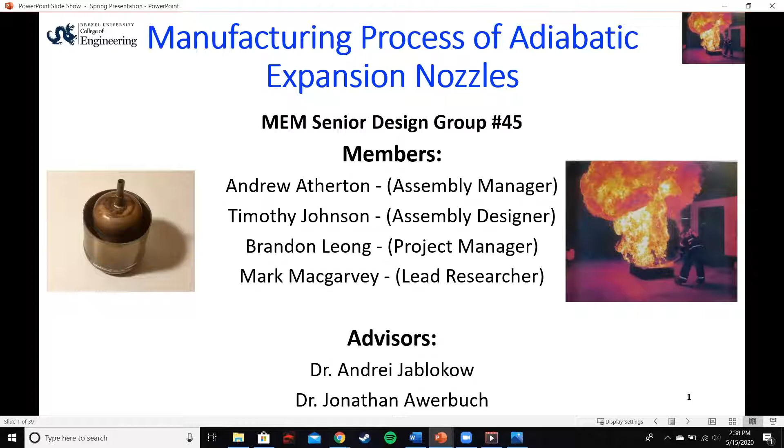The needs for our project were to create a similar extinguishing nozzle that was similar or reduced in cost. We needed to also reduce the production time from the current 5+ hours to about an hour per unit. We also wanted to maintain or exceed the current reliability and be able to put out fires with at least the same efficiency as the original methods or even faster.

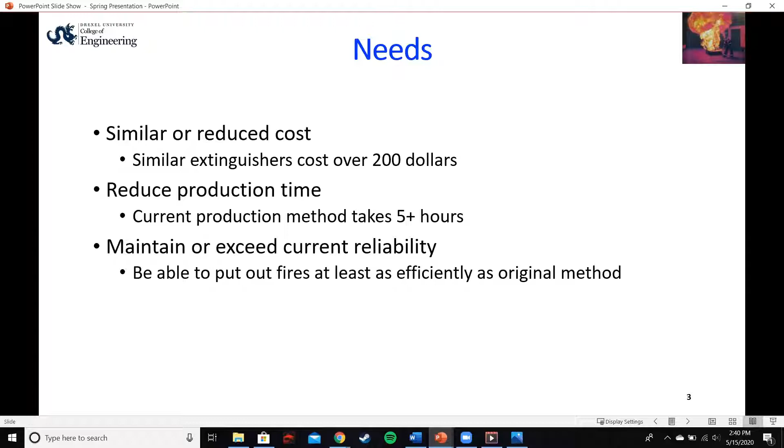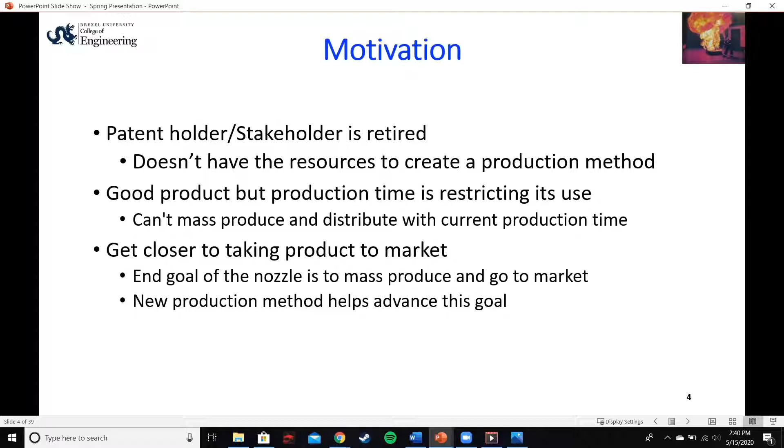So our primary stakeholder is retired chemist Robert Philipczak, the creator and patent holder. Other people who could use this product are police officers, firefighters, first responders, and small business owners.

Current production of the nozzle takes 5 to 8 hours per unit. It's unorganized and it has high production costs and many errors. Product cannot be mass produced under these conditions.

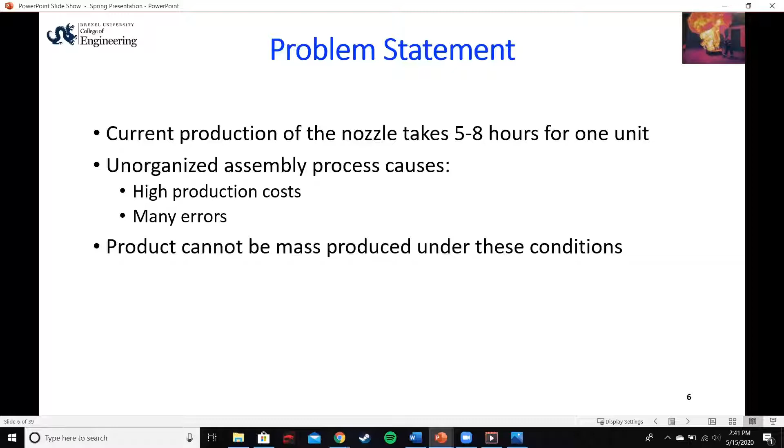So our solution is to develop an efficient and reliable assembly method, reduce current production time by a factor of 10, and minimize production costs and labor by a factor of 10.

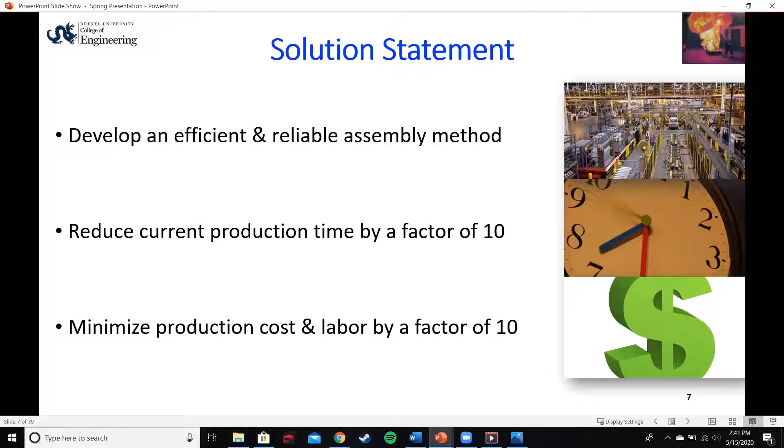Our approach had multiple methods. The first was to 3D print, the second a jig, and the third was to press fit all the parts together. We consulted various professors and machinists about proposed designs.

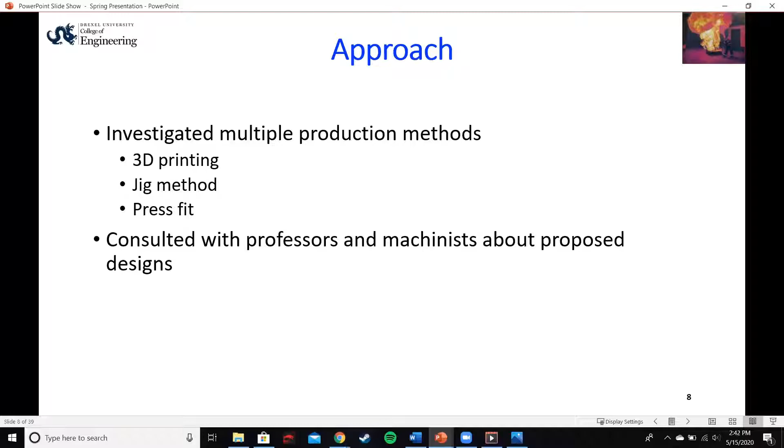Now I'll be passing the design description on to Andrew.

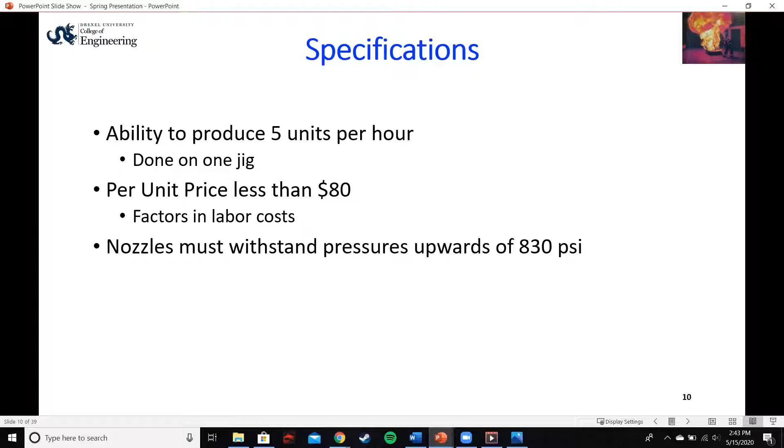For our specifications, we are trying to make 5 units at once done on a jig in 1 hour and cut the unit price down to $80, factoring in costs of labor. Also, the nozzle must withstand pressures upward of 830 psi.

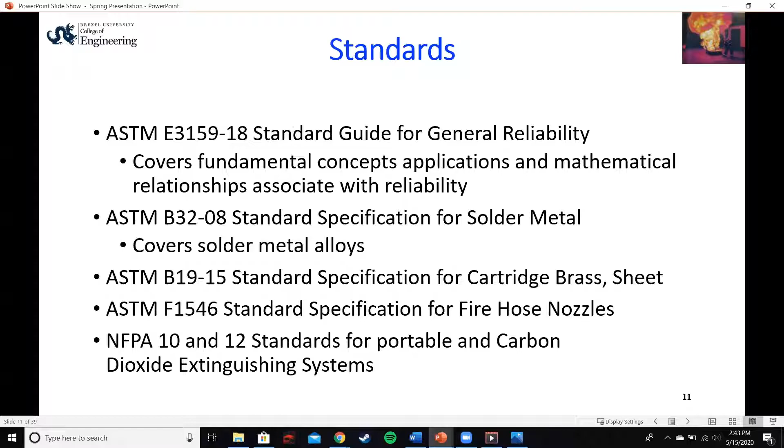Following are some standards that are used for the nozzle and manufacturing quality.

Due to the virus and the pandemic going on, we're no longer able to do any physical work on our project, which was stopped right after the prototyping. Therefore, we weren't able to do any of the physical tests that we had planned, including drop tests, flow tests, and putting the nozzles on real fire extinguishers to see how they worked.

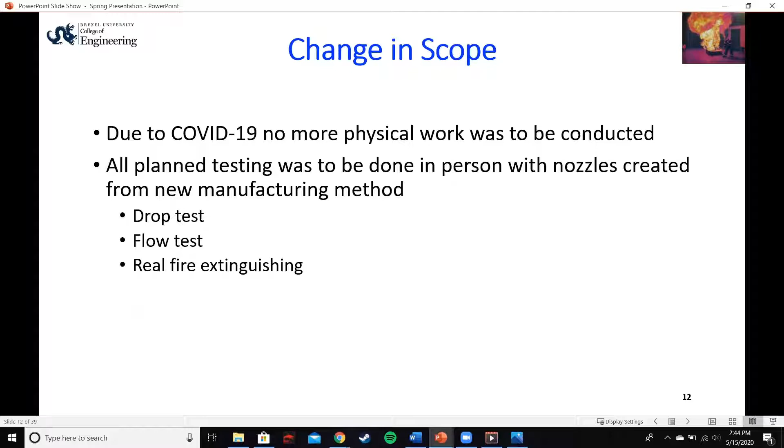Going over the concepts that we came up with, the 3 that we talked about were 3D printing the nozzle, making a jig to be able to put all the parts together more efficiently, and doing a press fit to avoid having to solder.

For 3D printing, one of the pros is that with many printers, we can be doing many of the nozzles simultaneously. One big problem is they take a long time to make one, taking upwards of 5 hours to make just a solid cube without any of the complexity that the nozzle would require.

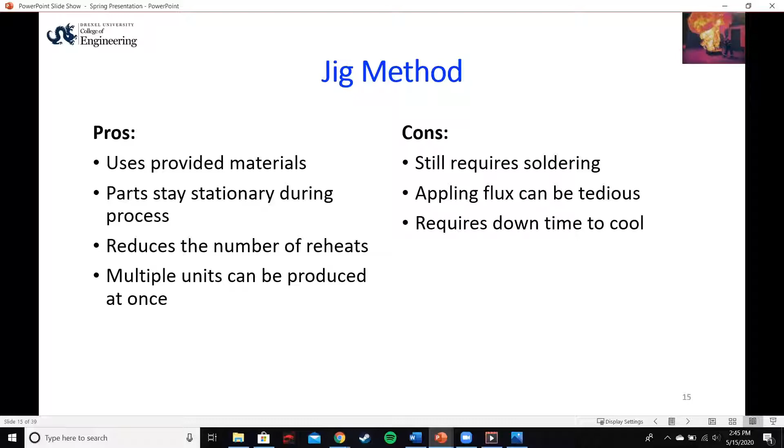For the jig method, one big pro is that we can have one jig that has a number of different stations, meaning that we'll be able to make multiple units at one time. But the big con to that is it still requires soldering, which can be tedious.

These 2 pictures are models of the jigs that we designed, first being just the plate without any pegs in it, second being pegs that will hold the parts of the nozzle before soldering.

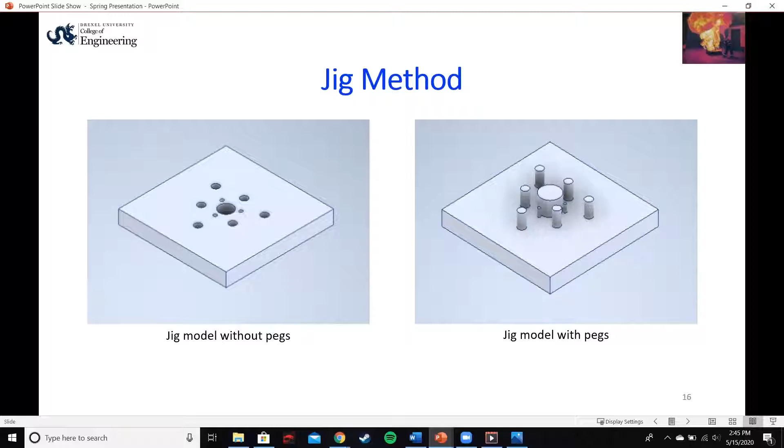For the press fit method, the big pro is that it avoids using soldering, which, like I said earlier, is very tedious. But the big con is the wall thickness for threading the end caps on is too small in the current materials that we have, therefore it will have to increase the overall size.

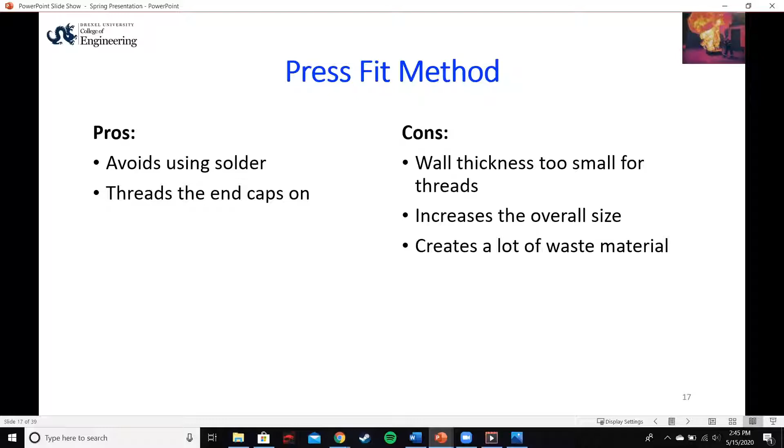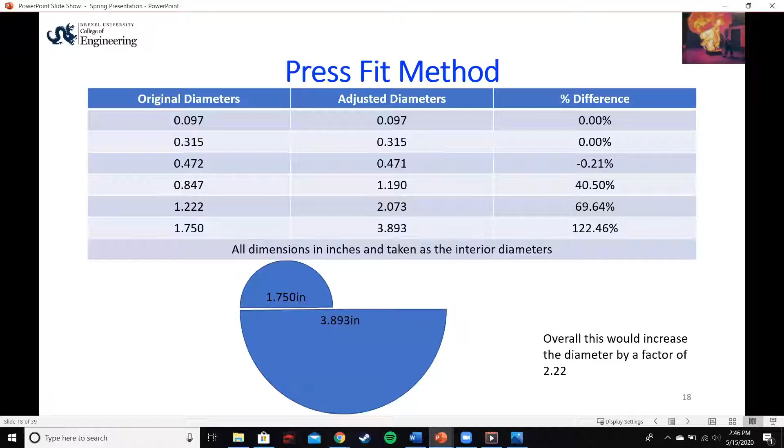So the method that we selected is going to be using the jig. So what we did is we took aluminum material to make the jig out of. Aluminum was selected because solder will not stick to the aluminum if it were to, say, drip onto one of the pegs as we were putting the nozzle together.

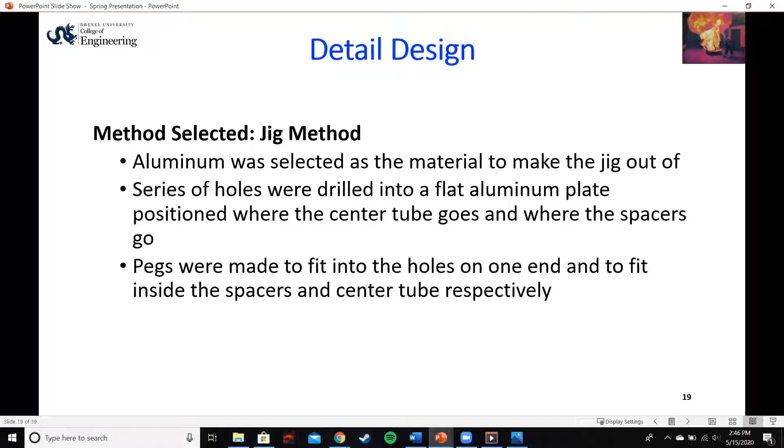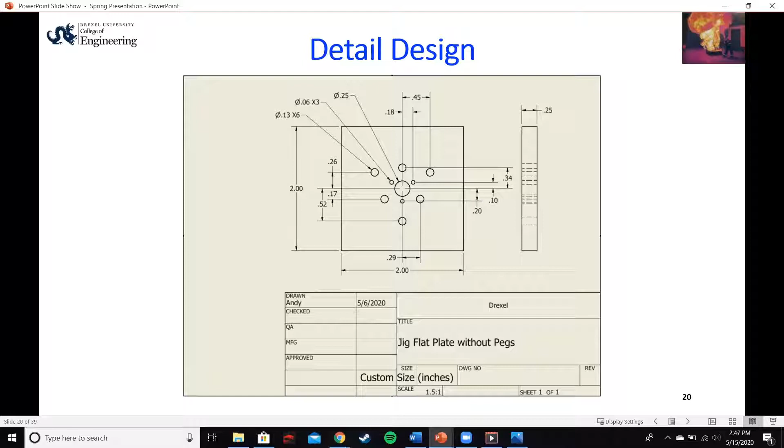Then a series of holes were drilled into the flat aluminum plate and pegs were put into them to fit the spacers on and the tubes simultaneously. Following is a CAD drawing of our plate with the dimensions for where all of the holes went.

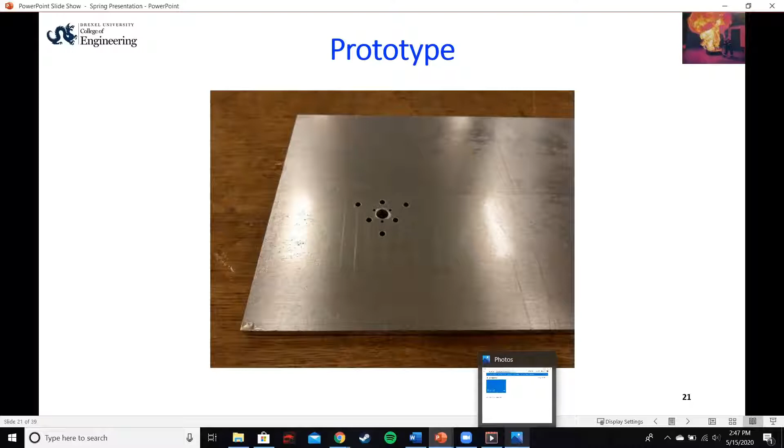Now, as a prototype, we didn't fully finish making our prototype. This is just the aluminum plate that has the holes drilled into it. But if you direct your attention here, we have an animation of where the nozzle would be going.

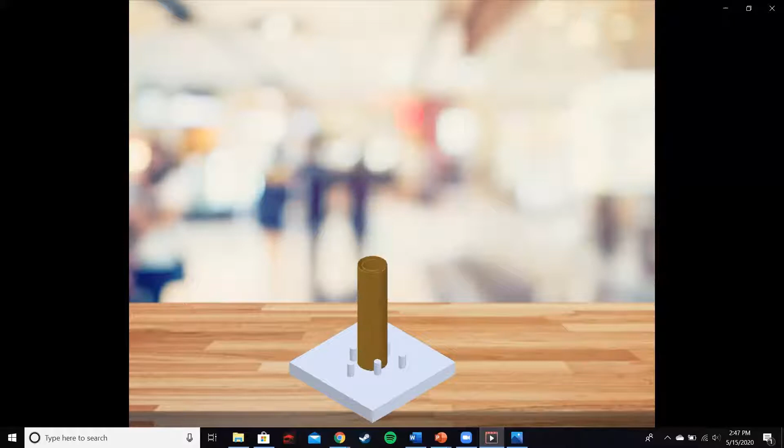So first we have the center tube come down into the center, and then we put on a set of 3 small spacers, which then holds the next tube a certain distance away and centers everything. Then the next row of spacers, as well as the next tube, and then this process gets copied one last time.

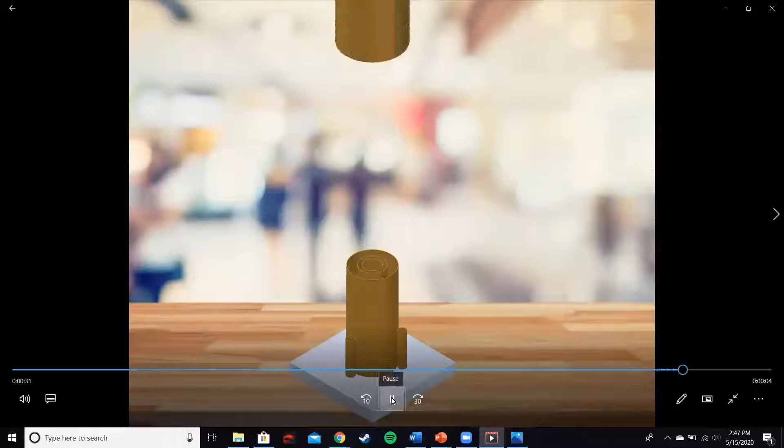So now I'm going to pass this off to Timothy to go over the discussion.

The first thing we have to look at in the discussion is, were the specifications met? With the testing we were able to do with the prototype, we did reduce the nozzle production time. This is just by default: if we can have 5 nozzles being made at one time, that cuts it from 5 hours to 1 hour per nozzle immediately.

We did not get to make a nozzle because all physical production was halted at the end of last term. So we made the jig prototype, but we did not get to construct a nozzle on it. The price of parts was roughly $75 per nozzle.

This can be reduced by purchasing parts in bulk. Ours were a very specific order, and they were even out of stock on certain things, so we had to order more expensive parts. It also depends on labor costs.

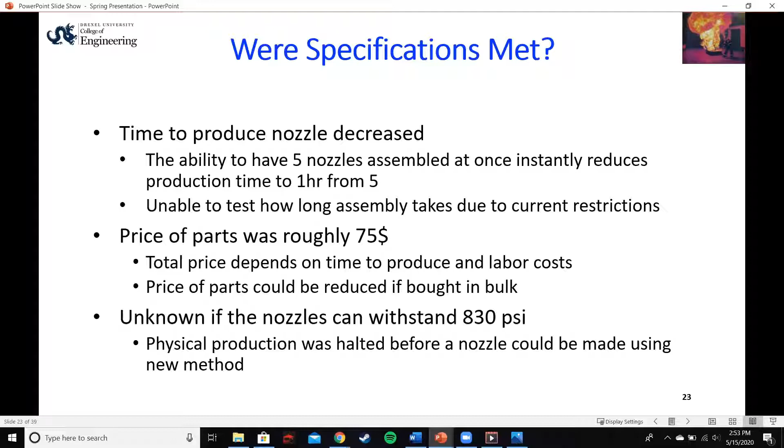The last thing is seeing if the nozzle can withstand the 830 psi that the original could, that the CO2 tank outputs. Since we couldn't make a nozzle, we also couldn't test to see if it could withstand it. Doing a simulated test on a CAD program doesn't really help us, because we are looking for imperfections in our design that would cause a failure. Theoretically, we already know that the nozzle can withstand this, because Mr. Philipsak's original model was able to put out fires, and it could withstand the pressure coming from the CO2 tank.

Next is the prototyping experience. The first thing we notice is that working with professionals is key to making a good prototype. In the fall quarter, the first thing we did when we realized we might be cutting things with metal is we went to the machine shop and talked to Mark Scheiber about, first of all, can we machine our design? Is it something that's possible to do?

Then next, we asked him for feedback on the design, and is there anything we can change that would make it easier to construct and easier to cut out. We also consulted him on things like threading the nozzle, which helped us decide that our one concept wasn't going to work because our parts were too thin.

The next thing we learned was that you should always double check your dimensioning. The first jig we constructed went off the patent dimensions, and those dimensions were not the actual size of the nozzle made out of brass that was being used. So we had to redimension it based off the physical prototype that we had from Mr. Filipczak instead of the official dimensions in the patent.

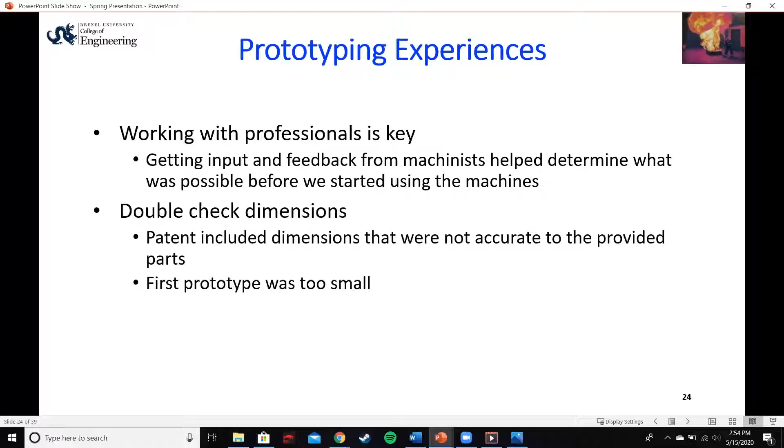Next was the analysis. Since our prototyping was halted before we could make a physical nozzle, we were unable to do any of these tests. The first was the drop test. This was going to be having the nozzle at a high height and dropping it to see if it can withstand the fall, measuring things like the forces it experiences. This would simulate everyday wear and tear on a fire extinguisher, maybe dropping it from a countertop, or if it's in a car, maybe falling out of the car or rolling back and forth and hitting the car walls.

The next test was a flow test. This was going to be conducted by calculating either the mass flow rate or the volume flow rate of the outcoming flow from the nozzle. This was going to be compared to the mass flow rate from the original nozzle to see if we can either meet the same mass flow rate or exceed the desired mass flow rate.

The last was to do an actual fire extinguish test and work with a local fire company to see if this nozzle actually works. The reason we couldn't do these or even simulate them is because they needed a nozzle that we had hand-created, so it would have common design flaws, things like the solder joint, welding and mating with the cylinders, things that would cause it to fail. It's hard to simulate these in software because you can't really design in imperfections.

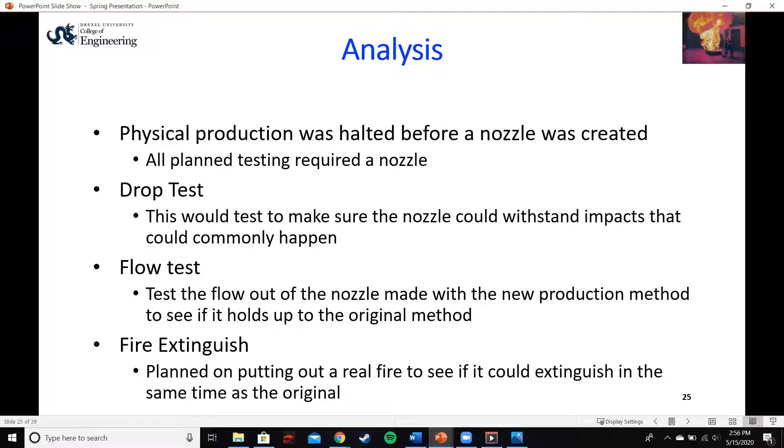Since we're not creating a new nozzle, we already know that the nozzle is going to work, and we're trying to see if our new production method works or not.

Next, I will also be talking about the methods. The first thing is the materials. We purchased flat and round stock aluminum that we used to create the jig. The rest was purchased by Mr. Filipczak and given to us to help in our testing. This included brass tubing and end caps and the tin solder and flux that we used.

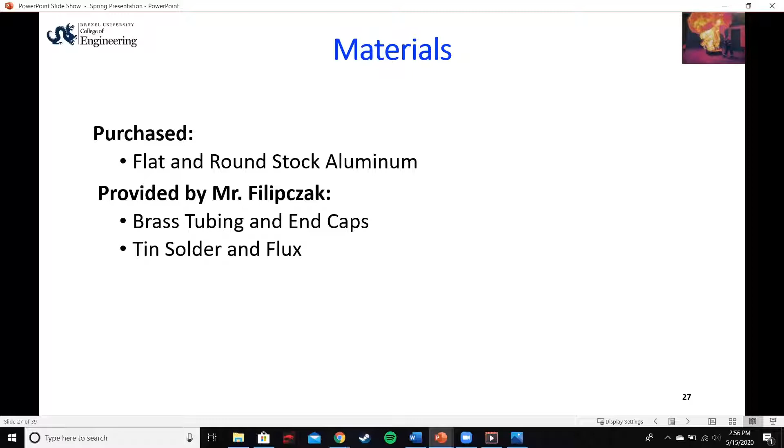Next is the fabrication methods. We spent most of our time fabricating in the machine shop. First thing we used was the end mill to drill holes into the aluminum plating. Next was the bandsaw that we used to cut the aluminum rods down to the length we needed. And the last was the lathe that would turn the aluminum rods down into the pegs that we could place in the holes in the jig.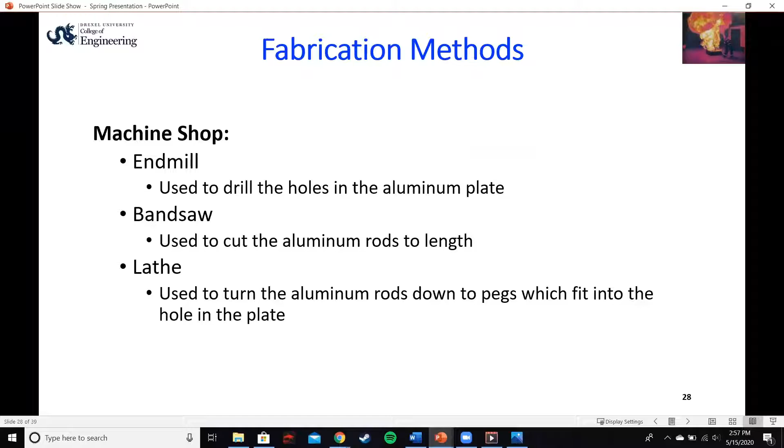The software we used was for CAD, mainly Autodesk Inventor. We used this to design the jig and make animations of the nozzle assembly using the jig. We also used Microsoft Excel to calculate wall thicknesses and expansion factors when we were testing the idea of doing a press fit, knowing that we would have to make the nozzle bigger.

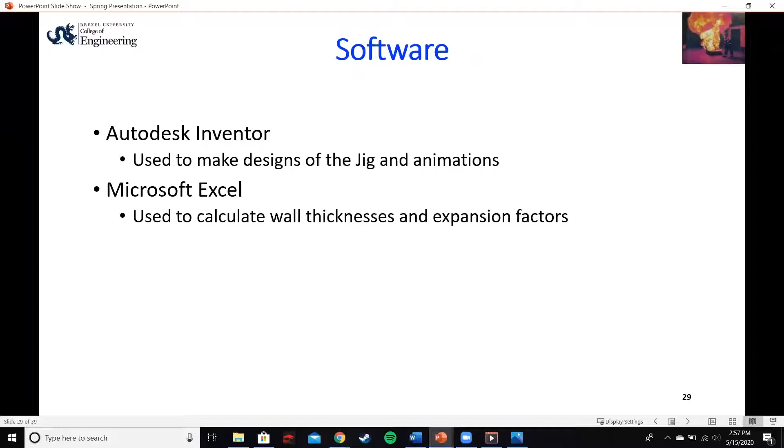Next I'll be handing over to Mark to talk about context and impact.

As far as economic impacts for the design, the nozzle costs less than a traditional CO2 fire extinguisher. These extinguishers typically cost around $200 plus.

As far as environmental impacts, using CO2, there are no harsh chemical reagents needed to extinguish the fires, compared to a halon agent, which has a negative impact on the ozone and other negative environmental impacts.

As far as social impacts, the use of the assembly line process with the jig will produce additional jobs, and the nozzle will be able to be used by both first responders and civilians.

As far as ethical impacts, the extinguisher must be reliable and efficient in extinguishing fires, because if not, it will cause significant harm to the operator. It also must bring peace of mind, knowing that the fire will be extinguished without ruining appliances or equipment.

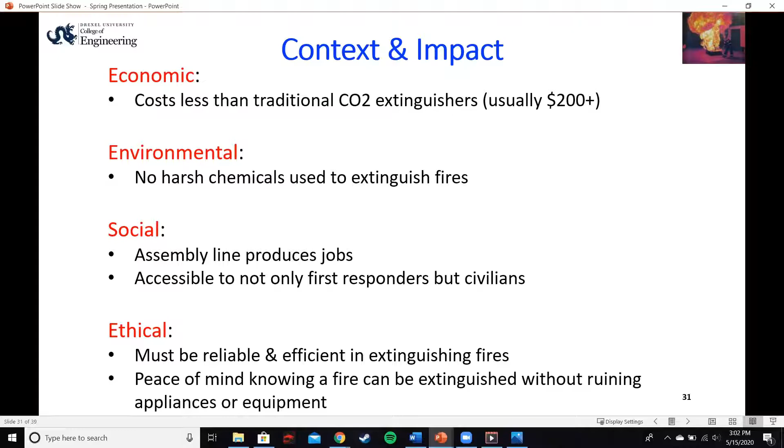Now I'll cover the summary and conclusions. We found multiple proposed solutions for the problem, and when we presented and received feedback on the solutions...

Through our feedback, we found that we did not have many modern manufacturing methods such as 3D printing. We investigated these, and additionally with 3D printing, we investigated a press fit method.

We determined through our investigation of all these methods that the most viable solution at the current time was the jig method.

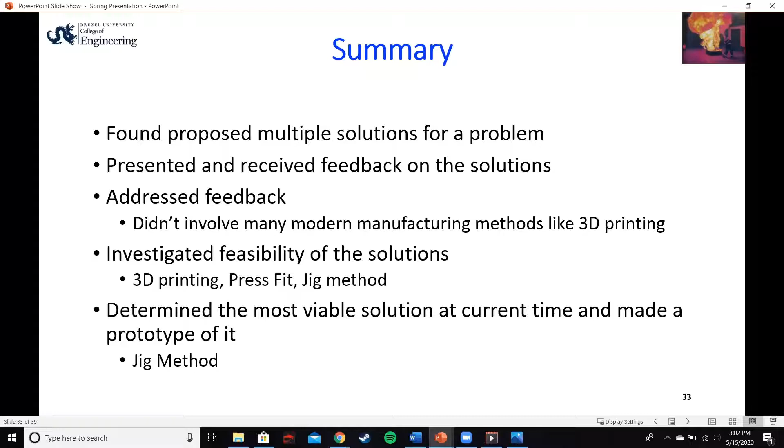As far as things that went well, the handling and addressing of the presentation feedback regarding the use of modern manufacturing techniques went very well in our research into those methods.

Physical prototyping and machining also went well, with our experience in the machine shop and our help from the workers in the machine shop.

The winter poster session and prototype presentation was also extremely useful, with feedback from the faculty in relation to changes we can make to our project.

The challenges with this were finding a group and a project early in the year, spending time researching all the different methods, and not having enough time to design our specific method, which was the jig.

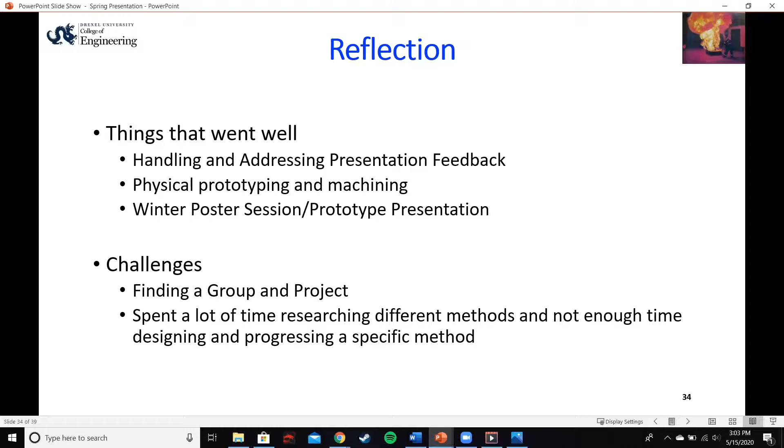As far as lessons learned, the first one is to find a group and project way before senior design starts. Specifically, look for one maybe in your MEM 391 course.

Focus on one solution that works. Do not spend too much time testing other methods.

Practice presentations early and often to make sure everything works. Maybe specifically practice presentations in the place you will present in. Our videos in the fall presentation took a while to start loading and cost us about a minute's worth of time.

Do not trust one source for dimensions. We used the patent, and the dimensioning on the patent was incorrect for the actual parts we had.

As far as recommendations for rising seniors, again, find a group and project at the latest by winter or spring of junior year. Talk to your professors about any project designs or ideas they might have, and delegate responsibilities early, establishing a project manager who can keep you on track with all the deadlines.

Stay connected with your stakeholders and get feedback based on the decisions you're making at the current time. Start designing and prototyping as early as possible so you can find flaws in your design and fix them.

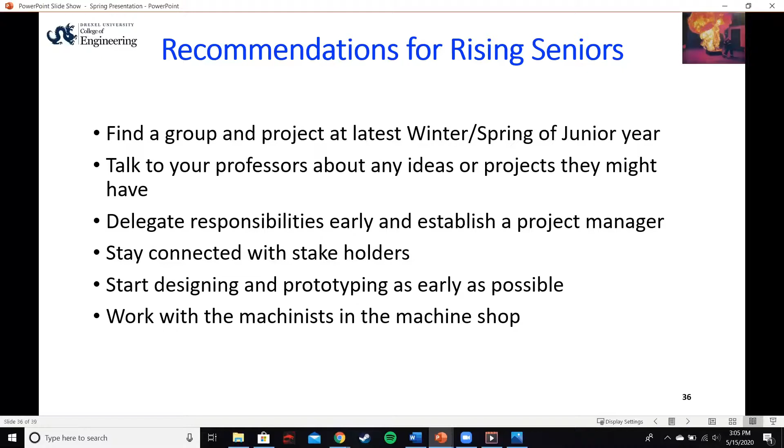Now I'm going to pass this over to Brandon so he can talk about the project management.

For our project, we had no fixed budget from the stakeholder. Nozzle parts were already provided, and the total cost of those parts was around $22,000. We received enough parts for around 20 prototype assemblies.

The only parts that needed to be purchased were the materials for the jig, and they were all purchased from McMaster. The total cost of those parts was around $75.

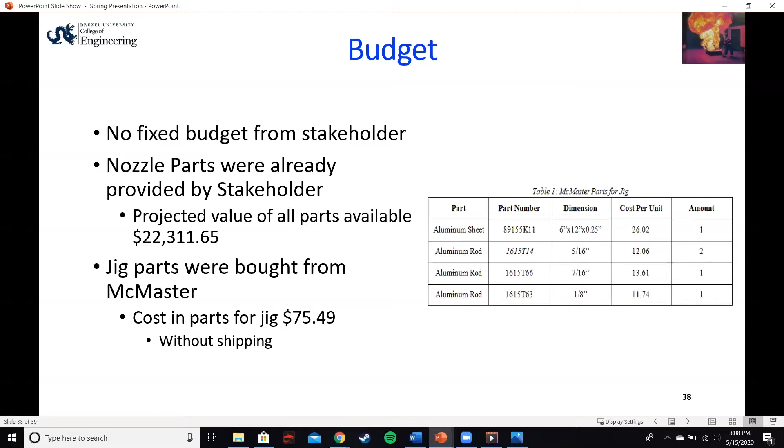Due to the COVID epidemic, we had to change our project timeline, and we just had to meet certain deliverables by certain dates. So the first thing we had for the spring term was the state of the project, which was addressing the issues that the pandemic affected, then the final report, and finally the presentation.

The video summary, the draft websites, and everything else were optional, which will be done separately.